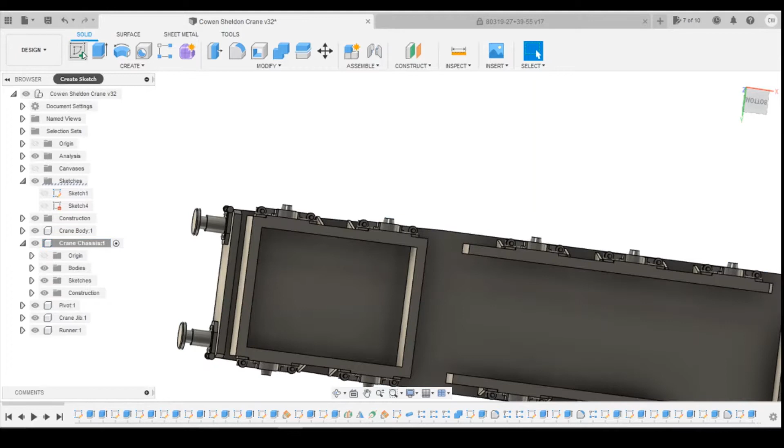We're going to continue on the crane again today. What we're looking at is drawing the mounting point here underneath for the bogie. Okay, so the first thing I'm going to do is make sure this radio button's checked on, and I'm going to create a sketch on the base surface of the chassis here.

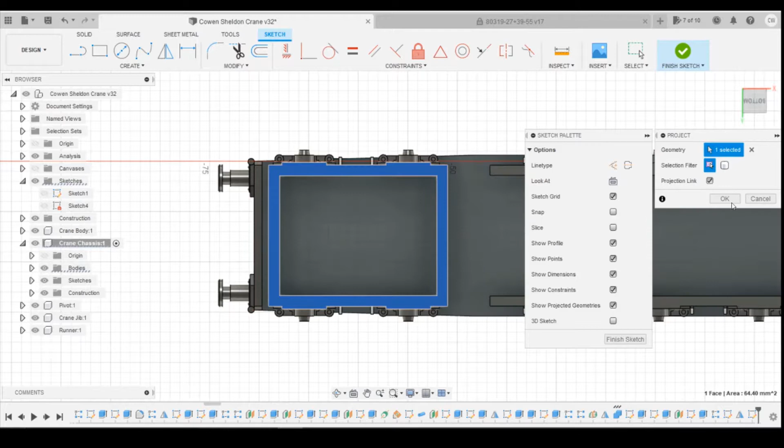I'm then going to project the bogie's outside dimension frame onto that surface. Just selecting the top surface here to project, click on OK, and then that should project onto the bottom here. So if we come into the bodies, turn the bogie off, you can see it's now projected that sketch dimensions.

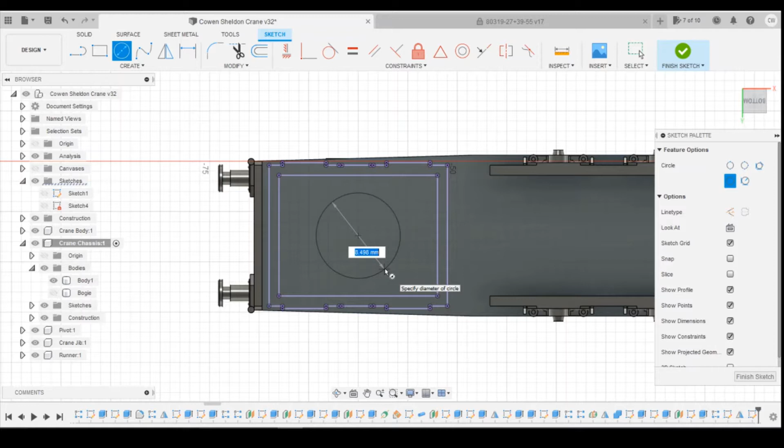Okay, so now I'm going to create a center point circle. I'm going to find the midpoint of the bogie in both directions. I'm just going to create a circle that would fit on the inside here. Probably going to go like 8mm. And we're going to use that as our boss that the bogie will initially sit on.

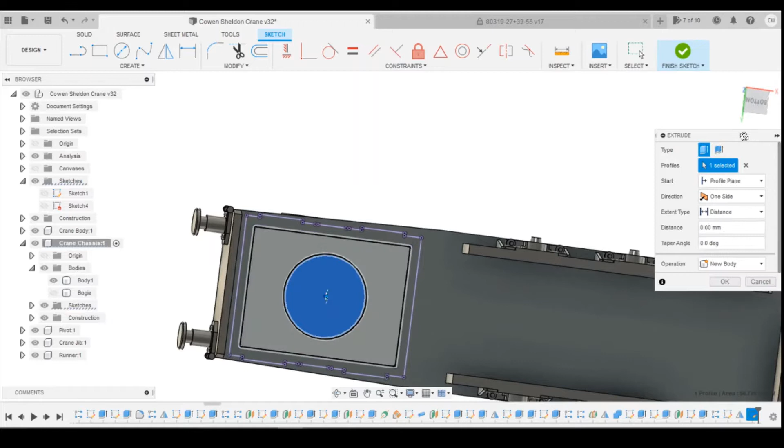Just define that so it's all centered up, and then we can extrude it. We're just going to come down by 1mm. Okay, so the next thing I'm going to do is create a sketch on that base surface we just created. I'm going to use a center point circle. I'm going to create a center pin of 3.75mm. And then we're going to extrude that by 1.5mm.

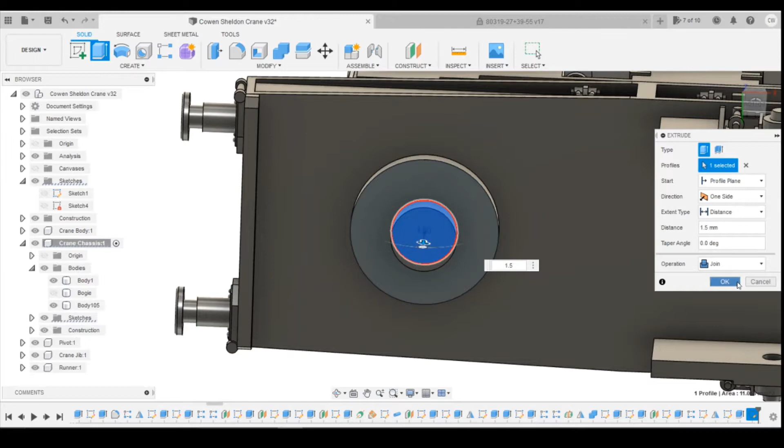And the bogie will sit on this larger surface. This will then come through the bogie, and we'll drill a little hole in here on this surface, create another center point circle, and we'll do this as 1.75mm. And this will be where our center pin will locate to hold the bogie in position. We'll drill this up to that top surface there.

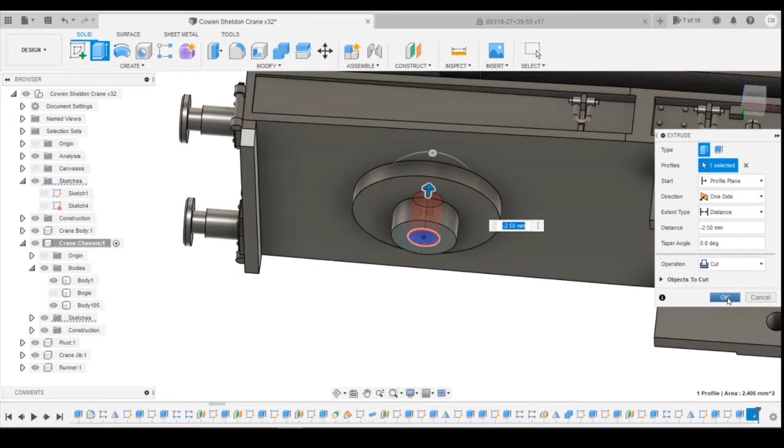That'll be our bogie mounting pin then. Okay, so now we've got our bogie mounting point. The next thing we need to do is create a pivot on the bogie that will connect to this. So we turn that bogie back on. You can see how that's now sitting inside.

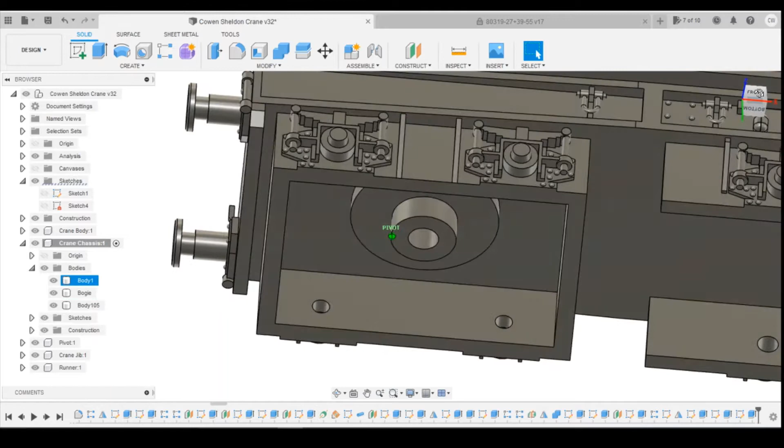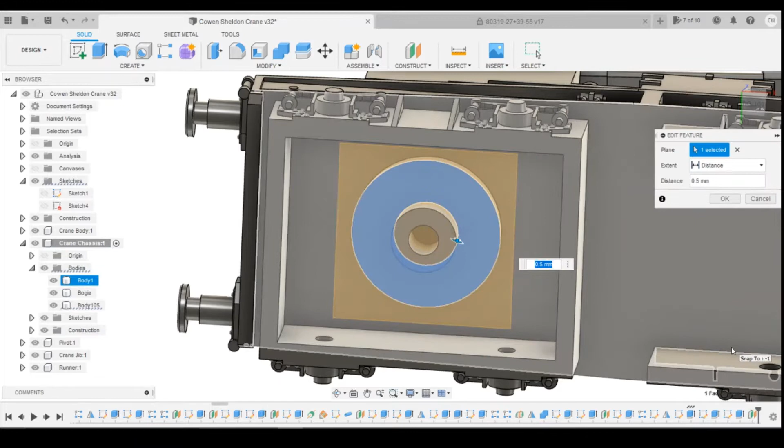What we're going to do is an offset plane from that surface. We're just going to bring it down and offset it by 0.5mm. In fact, I might do just a little bit less. I'm going to go 0.2mm because there isn't a lot of room up here for any movement going upwards, and we're essentially drawing a body that's going to connect to the bogie, which will then just rub on this surface here. So we create a sketch on that surface.

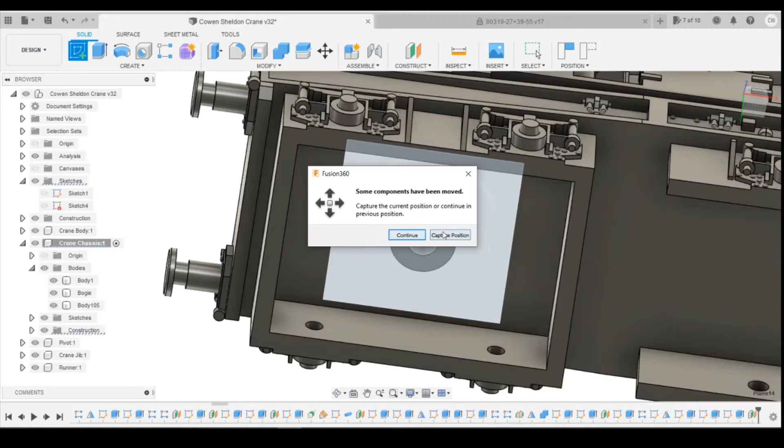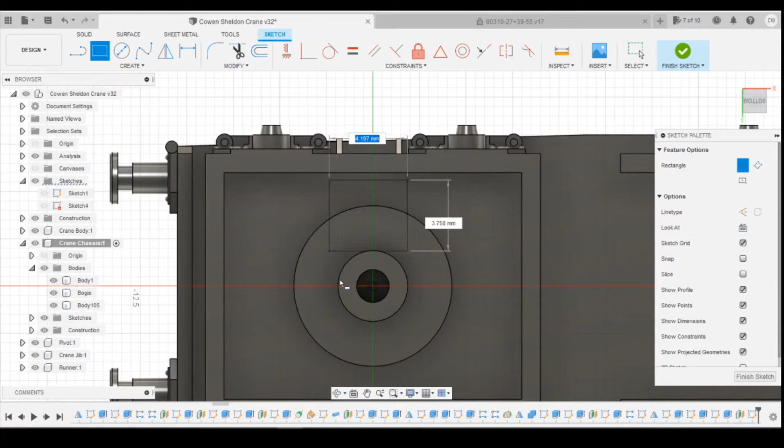I'm not sure what's that position, but we'll capture position, whatever it is. And then we'll create a rectangle. What we want is the rectangle to be out of the way of any of the wheels here. So we're probably going to have to be somewhere in this middle section here. And we'll constrain to the edges, both sides, and then we'll define to each corner there.

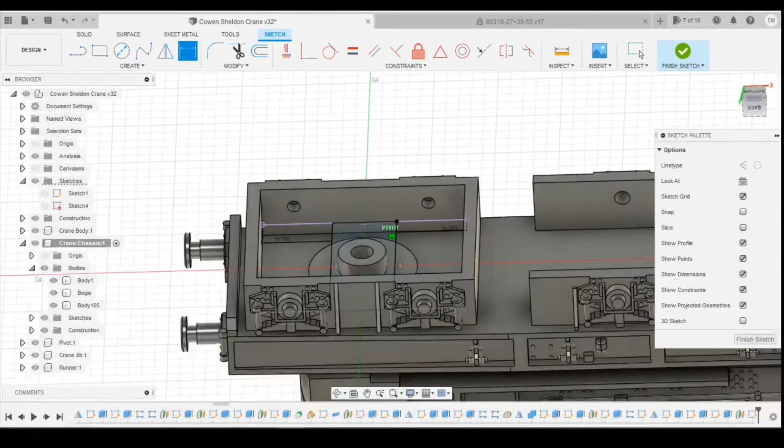You can see this actually might be an issue because of the size of the wheels here. Let's go 5.5mm there. 5.5mm there. And what we might have to do is make this center boss smaller. Or take a chunk out. Yeah, that'll be a better option. We take a chunk out here for the wheels. That'll be what we'll do.

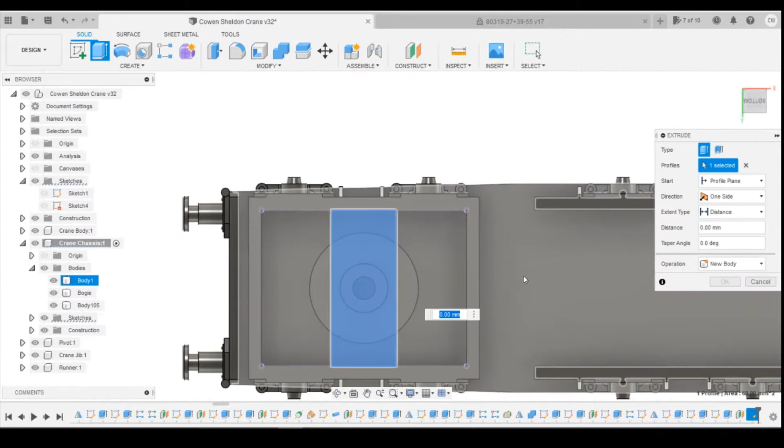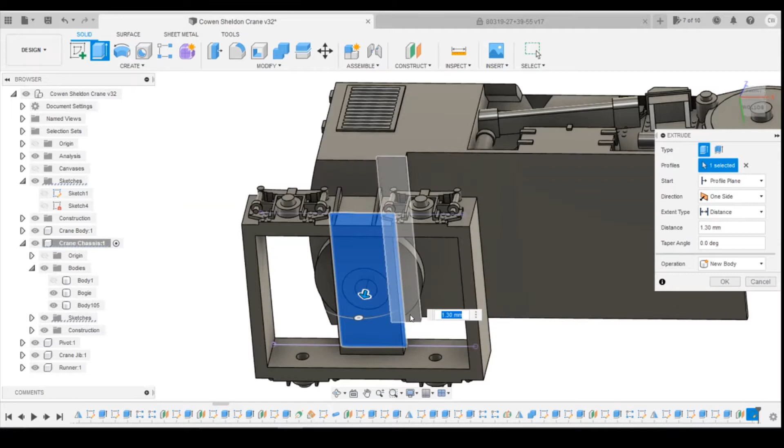Okay, so now we've got that connected. We're going to extrude that down slightly. 2mm will be too much. We're only going to want to come to the end of that pin there. And we're going to tell it initially to be a new body. I don't want it to connect to the bodies here. So we'll get it to join to hopefully body 1.

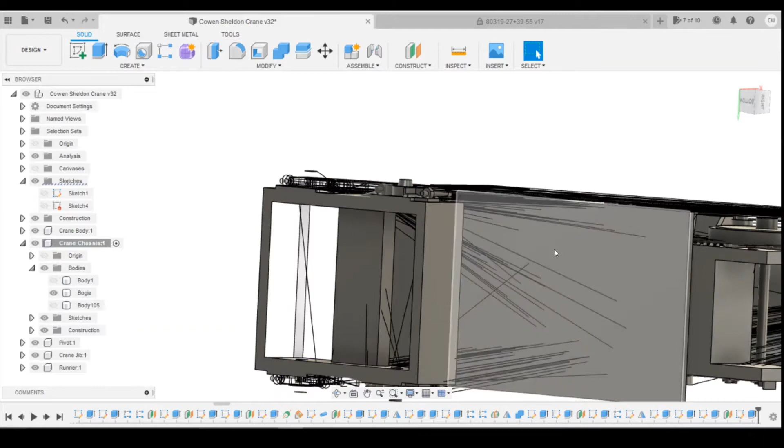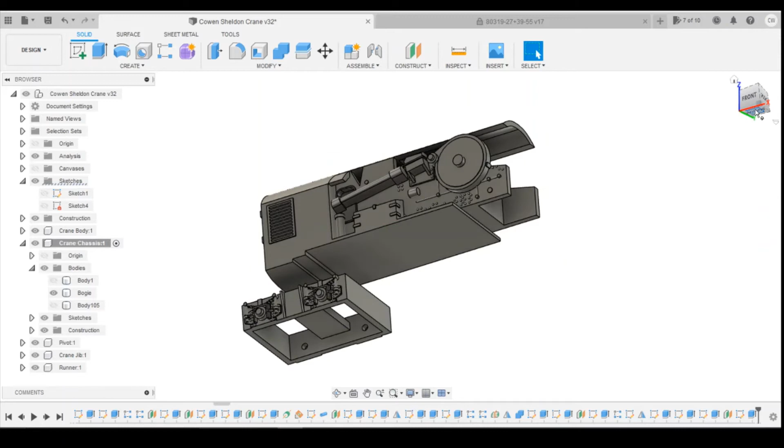That's made a mess. Let's have a look. Let's go back, forward, see what happens. Just a bit buggy there. I don't know what it's done there. That's just been a bit buggy for some reason. But that's looking okay there. So let's just go back on these. That extrusion there, I think, is the issue. That should have been, yeah, a join there.

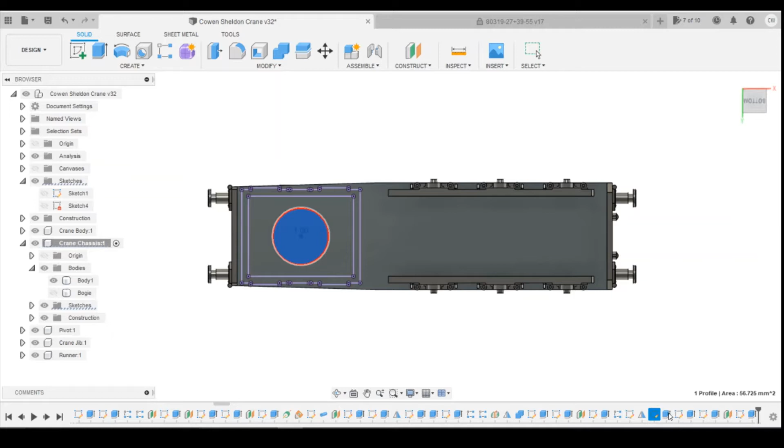Let's turn the bogie off now, get the body on. Let's see if that's right. Let's join that. There we go. That's better. So what happened is this has created a new body here. So we've just gone back in the history, edited the feature, turned that back to joining this body here.

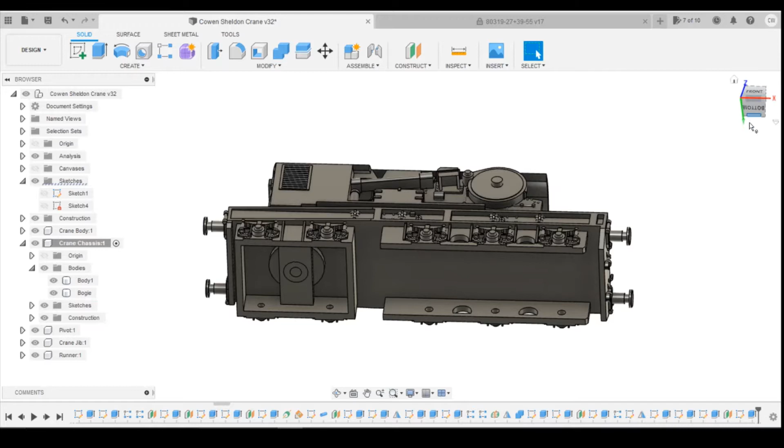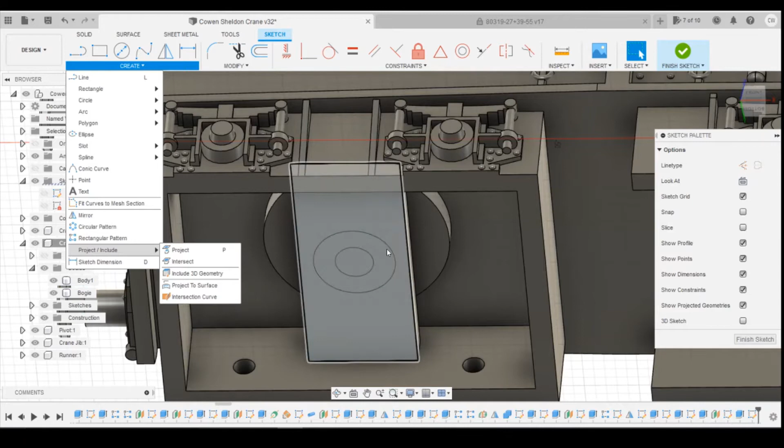Okay, so now we've got the bogie. We've got to drill a hole out of the bogie that's the same diameter as the hole here, but slightly larger. So what we can do for that is create a sketch on that surface there from the bogie, and we want it to be offset slightly from this boss, which isn't showing up. Not an issue. Again, what we can do is go project include. We want to project that line. Okay.

If we go back into our sketch, it hasn't done it, so create. Let's try again. Project include, project geometry for that. Click on OK. So we've now got that on that sketch. We can now do offset from that circle. We want it to be slightly larger because it needs a bit of play to be able to move. So we're 0.3 millimeters.

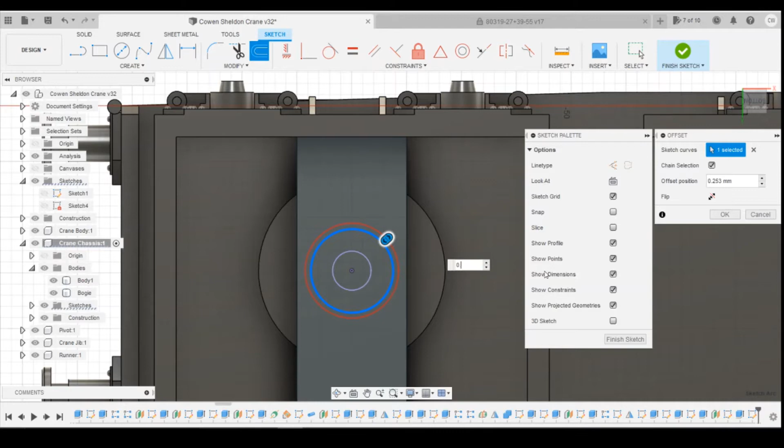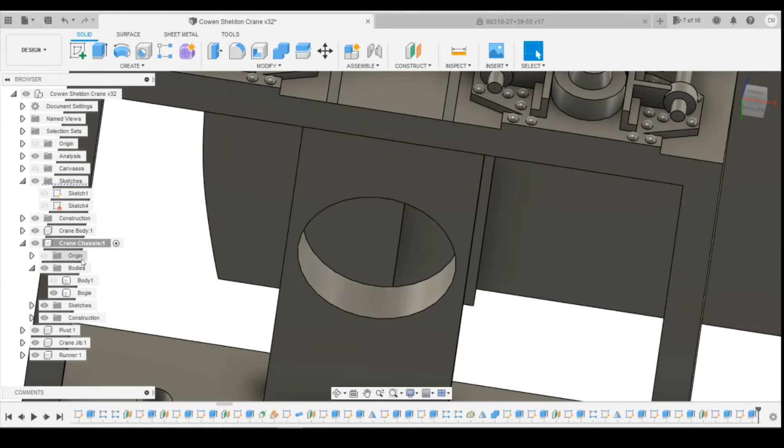Okay, and if we turn off the main body, we can then select everything in that circle and then extrude that to the other side. We've now got that center boss circled out with a little bit of play. We've gone for 0.3 millimeters bigger, which is going to give us about 0.6 millimeters in total because you'll have 0.3 on each side. Hopefully that should be enough with the swell in the resin, but it will need to be tested just to make sure. And if it is slightly too small, you can just run a little bit of a drill through there to help that out.

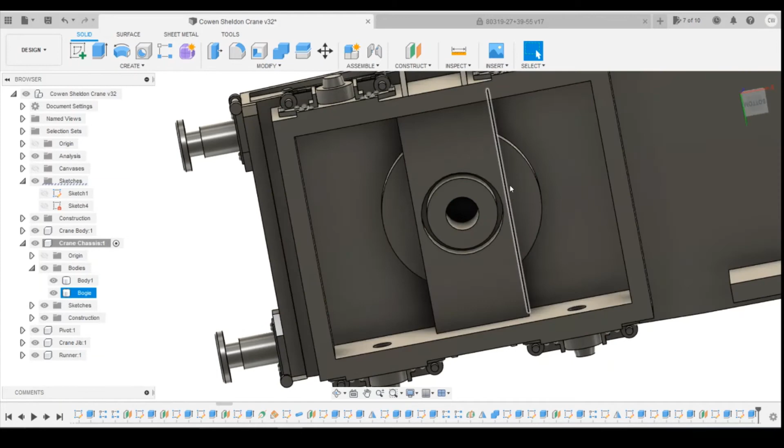Okay, I'm now going to help these be a little bit stronger on the side here because that's not a lot either side. So let's turn off the body and we'll turn off the crane body so we can just look at the bogey now. I'm going to create a small rectangle just on this surface here that's going to thicken the narrowness in that area.

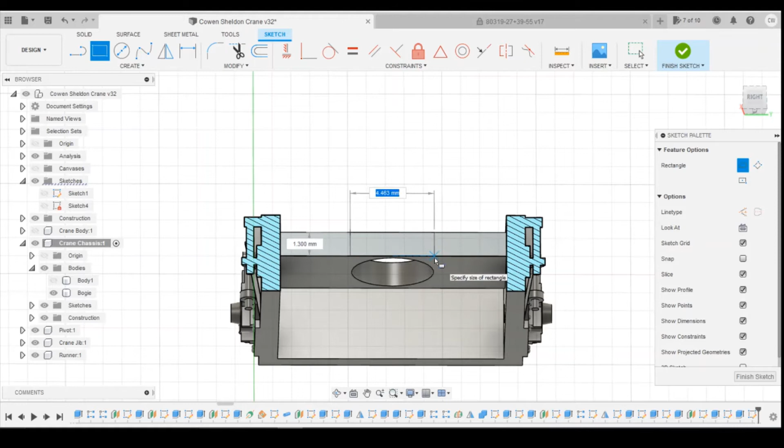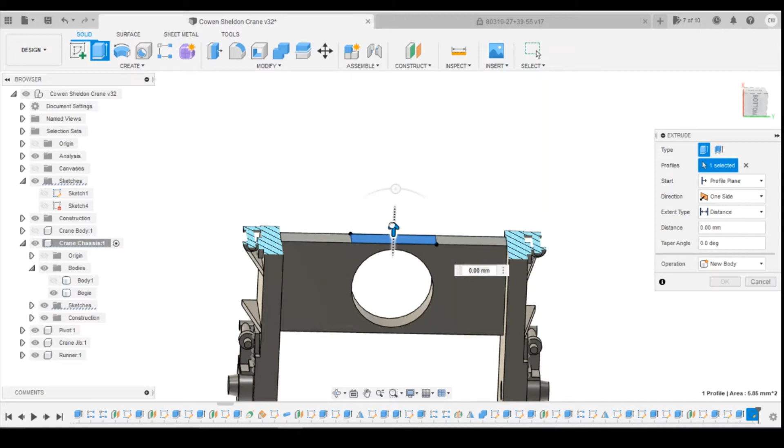Just going to use the midpoint constraint to constrain those, and we'll define the length. We'll go 4.5 millimeters. There'll be enough room here for the wheels either side. And we're going to extrude not a lot, maybe just 1 millimeter, just to give it a bit more meat either side here, be a bit more strong.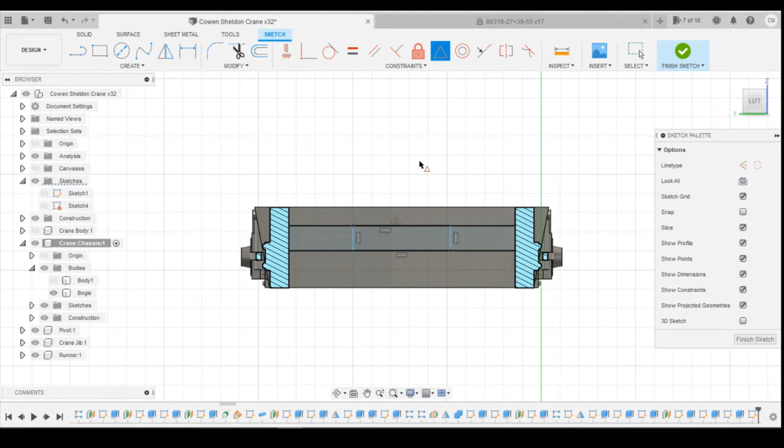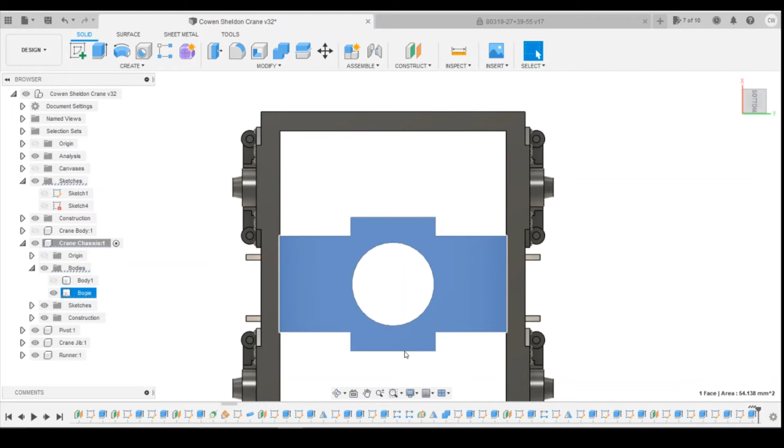Okay, and we'll do the same on this side, so we'll create a sketch on that surface, slice through, same rectangle, do the midpoint, millimeters and extrude 1 millimeter. Make sure that's all joined. Click on OK. Don't know if that's matching that. Yeah, so that's just giving it a little bit more meat in this area, so it's not quite so brittle. You could diagonal these off here if you wanted to, but I'm going to leave it as it is there.

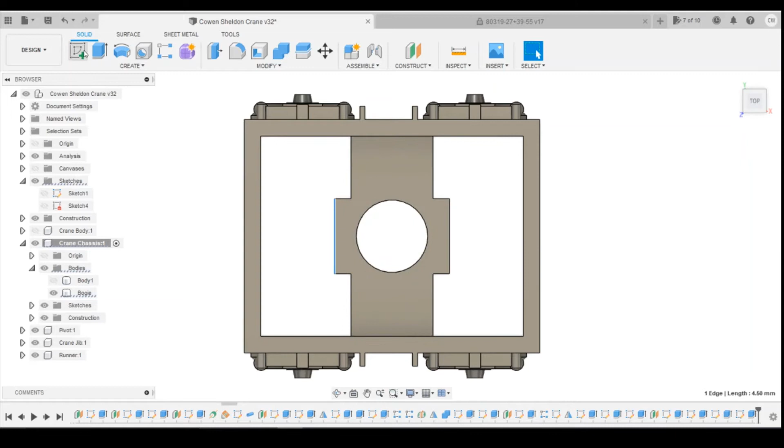And I think what we might have to do is, to allow the wheels to fit in this area, we're going to have to take out a little chunk. So we're going to create a sketch here, and I'm just going to remove, say, 2.5 millimeters. Oh, no. 1.5 millimeters in that direction by 2.5 millimeters in that direction. I'll do the same on the other side here.

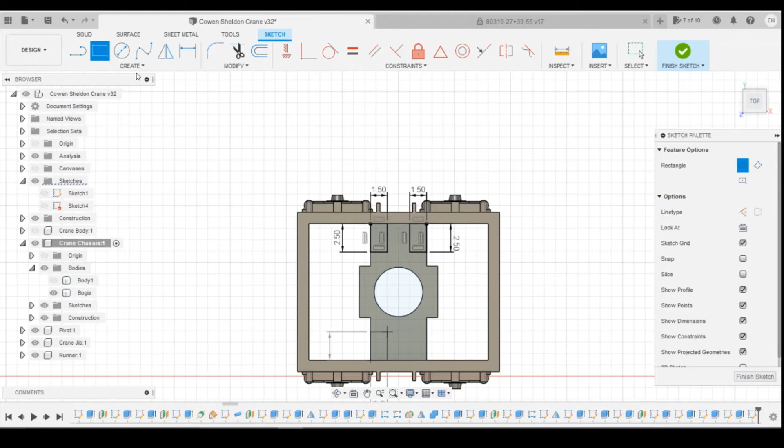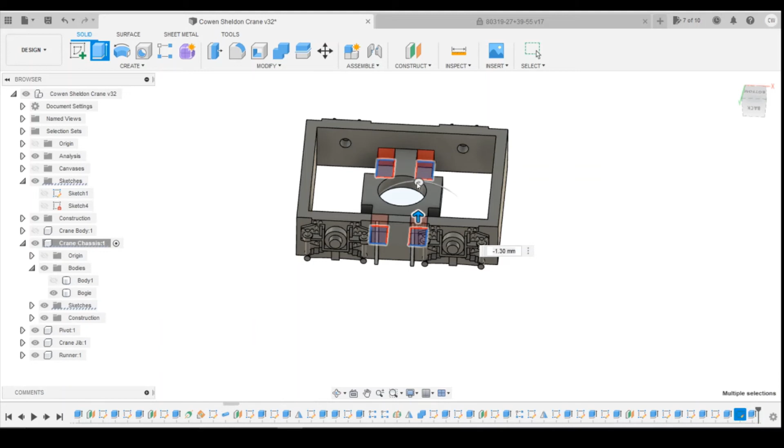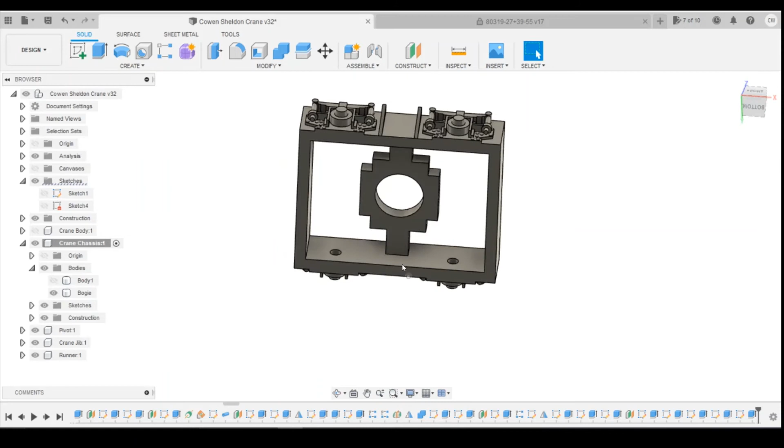And just extrude all of these way through to the other side. And those recesses there, just so there's enough room in this area for the wheel to not be interfering with it. That should work okay. If we need to make it a little bit stronger, what you could do is just extrude these a little bit up here, but I think that should be okay because it's still got 2 millimeters in the center there. But we'll have a look. Obviously, we're going to have to test this once we print it out. But that's how we do that bogie.

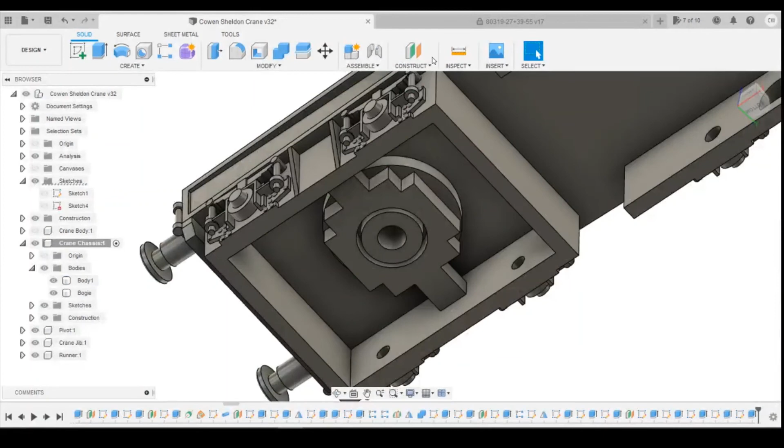Obviously, you're then going to need to draw a center pin here, which is just going to go up into the center circle hole in the middle of the body here, this hole, and it's got to be larger than the outside of this circle, which won't be an issue to draw. It'll be a 2-minute job to draw that pin. Okay, so to draw that, simply create an offset plane from that top surface. We're just going to go 0.1 millimeters, just so we're not touching. We're obviously creating a new body here, so we're going to create a body off of that surface here.

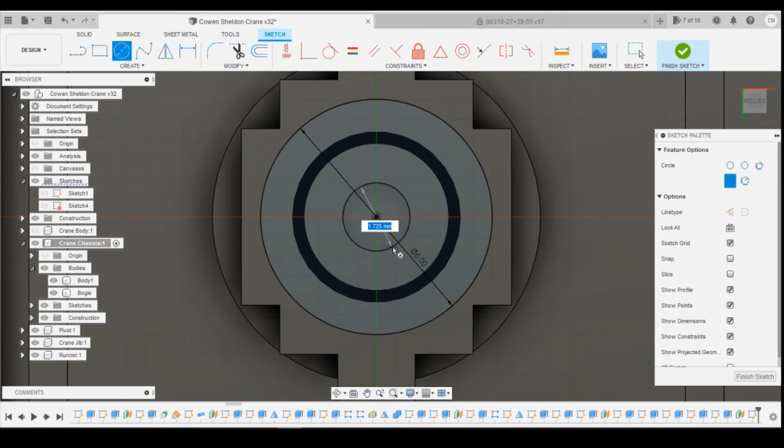Circle using the center point. We're going to go initially a larger circle. It's not going to go over the edges here, because if it comes over here, then you're going to have issues with catching on things. But it's just got to be big enough here. So we're going to go for 6 millimeter top diameter. We're going to extrude. Actually, wait a minute. Before we do that, we'll create the center pin. So we've got 1.75 millimeter middle there. We're just going to create a circle. In the middle is 1.5 millimeter.

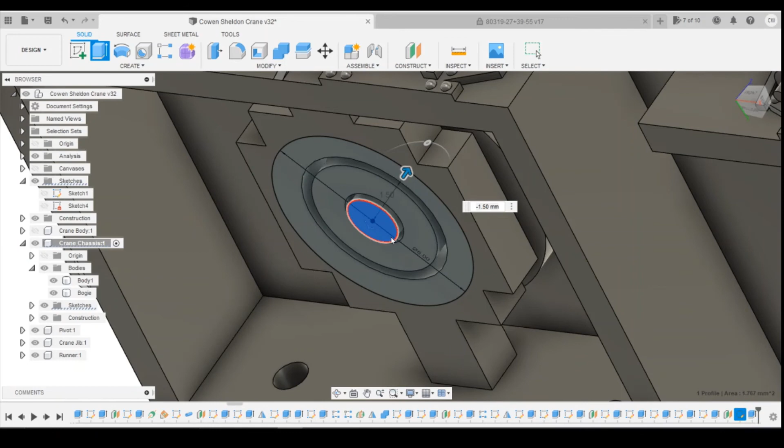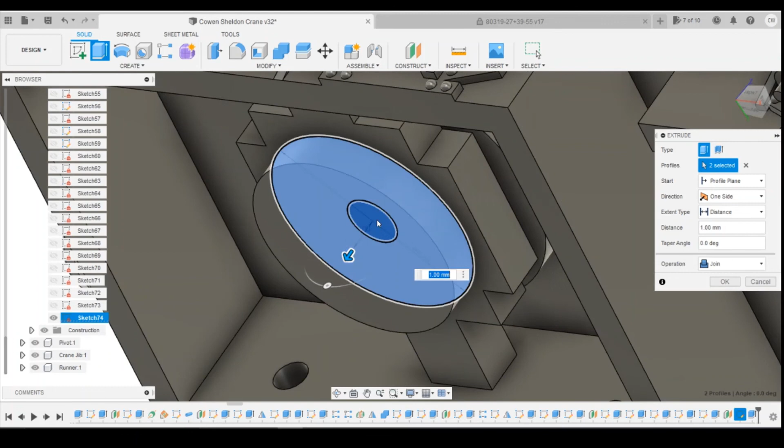Okay, so that pin is going to extrude into the hole, and I'm just going to go 1.5 millimeters. Okay, and I'm going to glue this in afterwards. So that's going to go up 1.5 millimeters. Turn that sketch back on. This one. Sketch 74. Just select the outer and the inner profiles, and then extrude. I'm going to come down 1 millimeter to give it a little bit of meat there. Click on OK. And turn that sketch off, which turns off all the sketch markings here. So now we should have an extra body here.

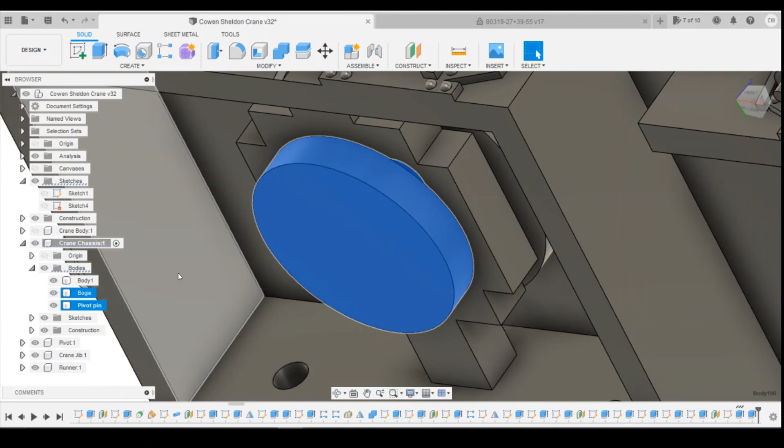We'll just go in and rename that. Pivot. So we've now got the main body, bogie, and the pivot pin there.

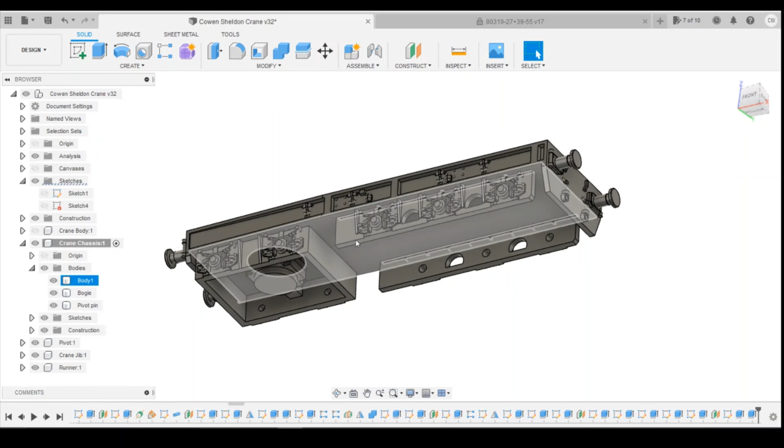So when we go to draw the jacking points on each side here, what I'm going to do is draw them as separate bodies. We'll initially test this, just print this out as it is, test it, see how it works. If it works fine, then we'll add the mounting points on, the jacking points as part of the body. If it doesn't, then I will be turning this into a bogie.